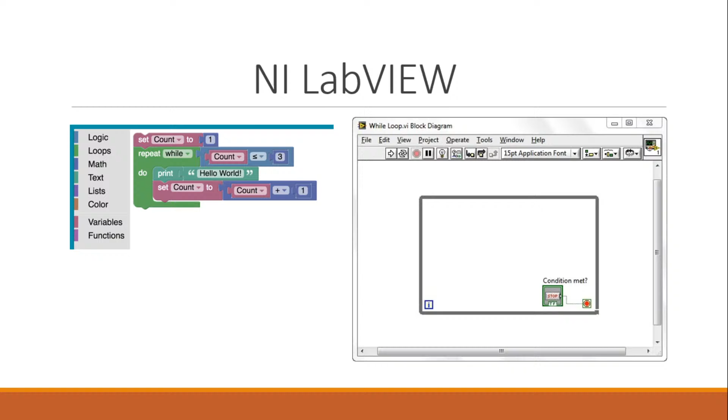So this is how the data flow based or graphical programming works. Let's see the benefits of G programming. So it's an intuitive programming language.

Like most people, engineers and scientists learn by seeing and processing images without any need of conscious contemplation. Many engineers and scientists can also be characterized as visual thinkers, meaning they are especially adept at using visual processing to organize information. In other words, they think best in pictures. This is often reinforced in colleges and universities, where students are encouraged to model solutions to problems as process diagrams. However, most general purpose programming languages require you to spend significant time learning the specific text-based syntax associated with that language.

And then map the structure of the language to the problem being solved. Graphical programming with G provides a more intuitive experience. G code is typically easier for engineers and scientists to quickly understand because they are largely familiar with visualizing and even diagrammatically modeling processes and tasks in terms of block diagrams and flowcharts, which also follow the rule of data flow. In addition, because data flow languages require you to base the structure of the program around the flow of data, you are encouraged to think in terms of the problem you need to solve.

For example, a typical G program might first acquire several channels of humidity data, temperature data, light data, mic or audio data, or picture data. Then it passes to the function where you need to analyze it, the analysis function. Then finally it writes the analyzed data to the disk, to an internet server, or to IoT based platforms. Overall, the flow of data and steps involved in the program are easy to understand within a LabVIEW program.

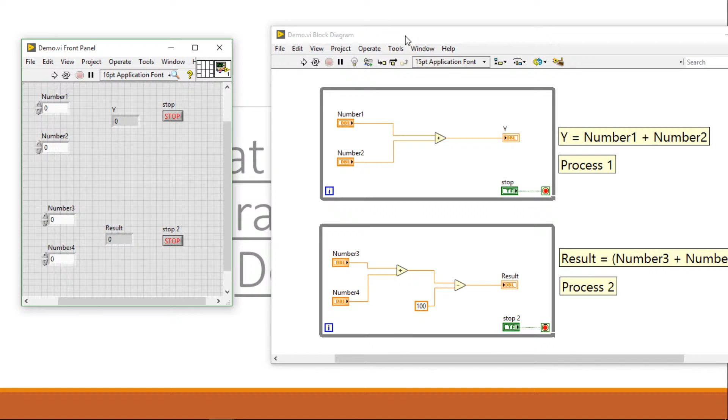So this is a LabVIEW program, a simple LabVIEW program where I'm performing two different tasks. Here, y is equal to number 1 plus number 2, you can call it process 1. And result is equal to number 3 plus number 4 minus 100, you can call it process 2.

As if you don't know about LabVIEW, let me talk about a few important concepts of LabVIEW. Whenever you open LabVIEW and want to write a program, that program is called a VI. You won't call it a program. Whenever I say this VI, that means this program.

So in every LabVIEW program, there is a front panel and a block diagram. What is the use of front panel? Front panel is for user interaction, to get the input and to see the result. That is the use of front panel. And what is block diagram? If you want to write any kind of logic, you write it in the block diagram. So in the simplest terms, front panel is the front end and block diagram is the back end, where you are going to write your logic.

So let's see what I did here. As you guys are aware about C language, C++, or any other programming language, that programming language has data types, structures like loops, for loop, while loop, if cases, switch cases - all these things, all the terminologies which you have been learning in C++ are available in this LabVIEW programming language.

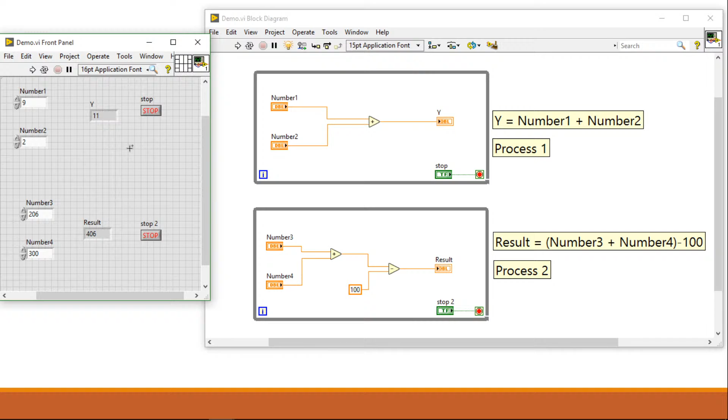So this is how you can create your own simple logics easily in LabVIEW just by using nodes. So when I said nodes, I haven't talked about how to call these nodes and how you can find all the functions. If you want a front panel element, just right click on the front panel and you'll find all the front panel elements available inside the control palette. You can use this boolean, you can see this...

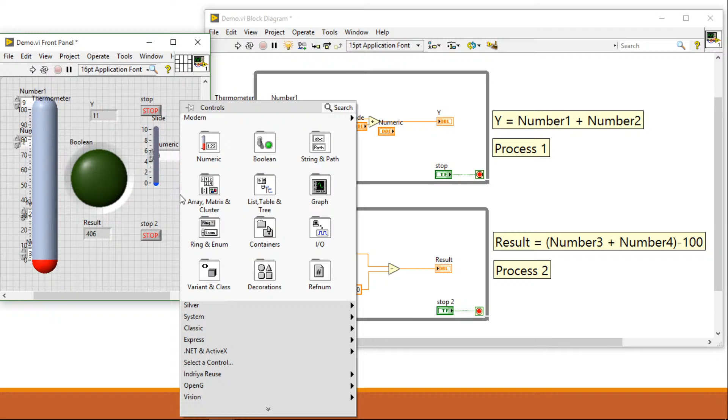...thermometer kind of thing here. So you can create your own supervisory control, right? You can create your own SCADA, you can create your own GUI, you can see this meter and all, right? So these are all controls and indicators.

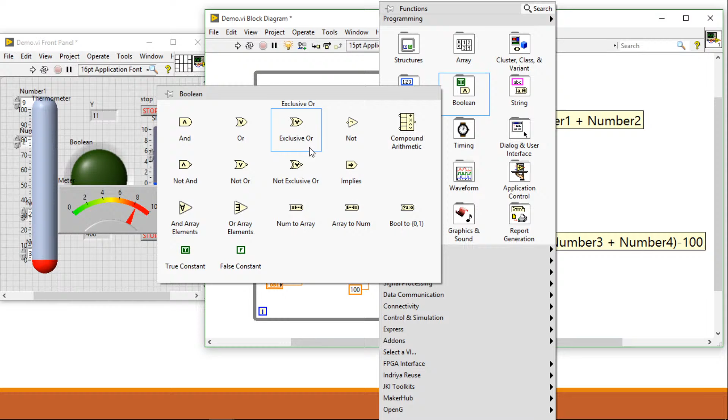If you want to find how to create logic, just right click on the block diagram and you will find the function palette. You can see add, subtract, multiply, all the logic based functions will be available here in the function palette whenever you right click on the block diagram.

So this is the very basic concept of LabVIEW. There are so many things you can explore.

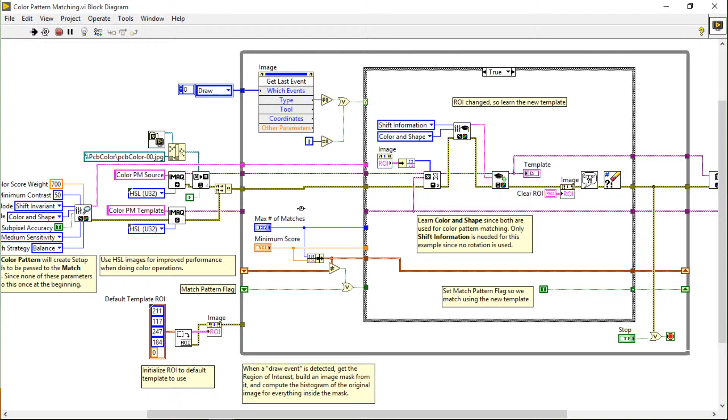I'll show you the program. This is the program of the PCB inspection code, right? So this is the while loop, you can see error handling, you can see there are IMAQ based functions which are specially made for image processing algorithms, right? These are the APIs. So this is the image processing based, or machine vision, PCB inspection system, right? So let me stop this VI.

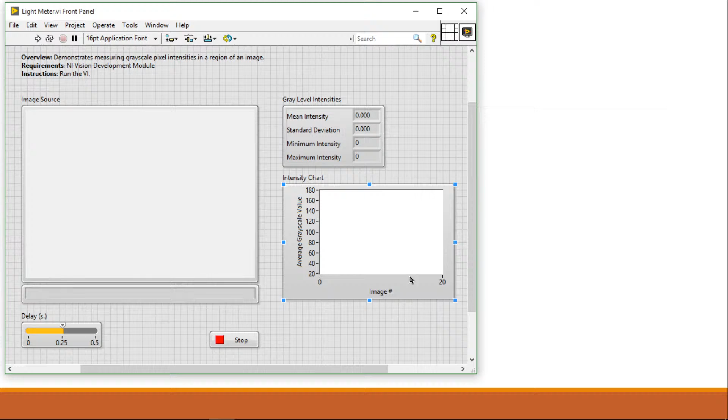This is called a Poka-Yoke system. If you want to launch or check the quality of your product, you can create this using a machine vision based system. Consider a company manufacturing lights, and you want to test the intensity of light. So how can we test it? This is how the system can be used. You can create your own system to find the intensity check, checking the intensity of light using this kind of algorithm.

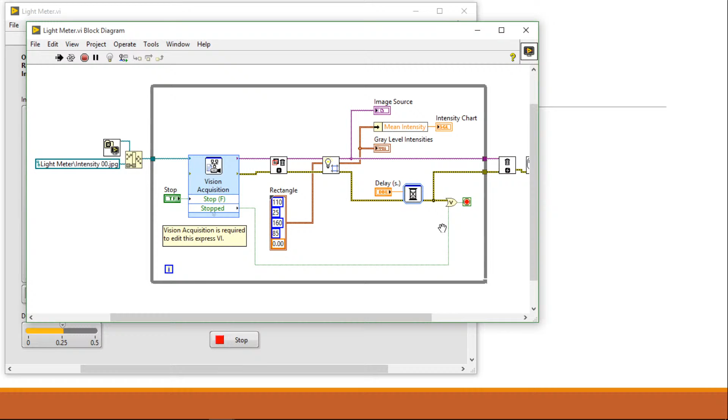Let's see the code. You can see the code is very simple, the simplest code. This is how you can create the algorithm to check the intensity of light. Of course these are simulations, but you can actually grab the image using a camera, industrial camera, smart cameras, and process it using LabVIEW.

So this is the PVC defect mapping system, for PVC pipes. This is how you can create the code. You can see the code in LabVIEW, right?

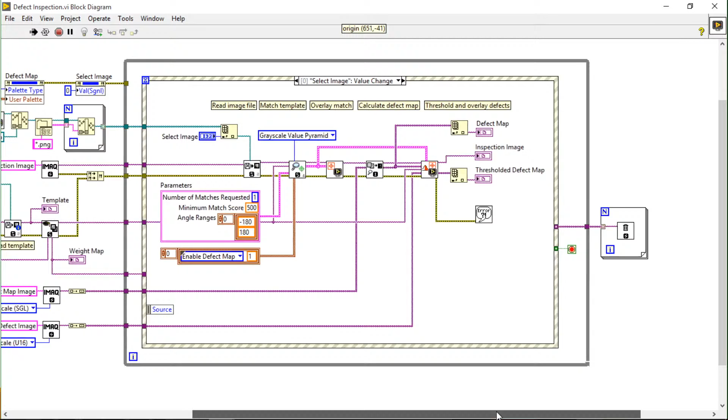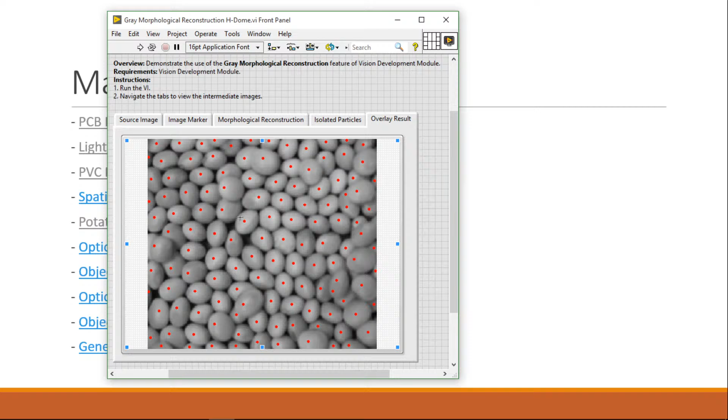Let's see, consider we want to create a project in the agriculture domain. I want to count potatoes, how many potatoes are there, using machine vision. This is the best way to count the potatoes. So many potatoes are here. These red marks are the analysis done by LabVIEW. You can see we can do morphological reconstruction, isolate particles, that's like blob analysis, and then calculate how many potatoes are here. So this is how you can count fruits or objects very easily.

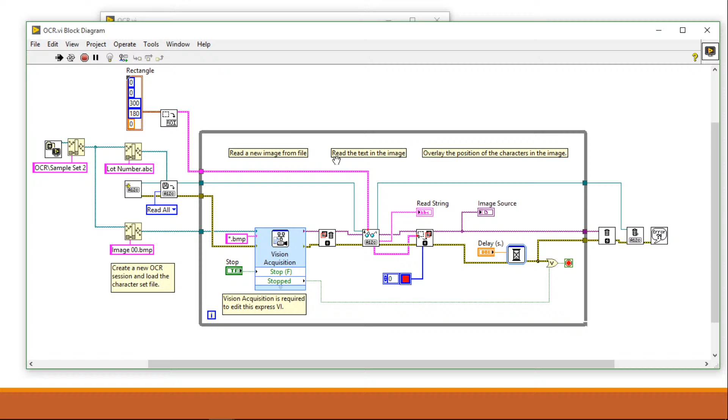Let's see an optical character recognition based application, a very booming concept. This is an OCR based application. Let's see the code. You can create datasets very easily to compare with the image. So this is the OCR based application.

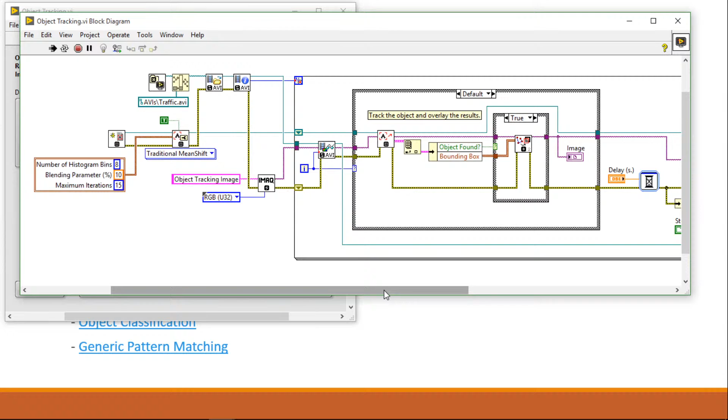Let's see how an object tracking algorithm works. This is the program where we are tracking a car, we are tracking a van. I hope you guys can see this. With the help of this algorithm, we can create this kind of application also.

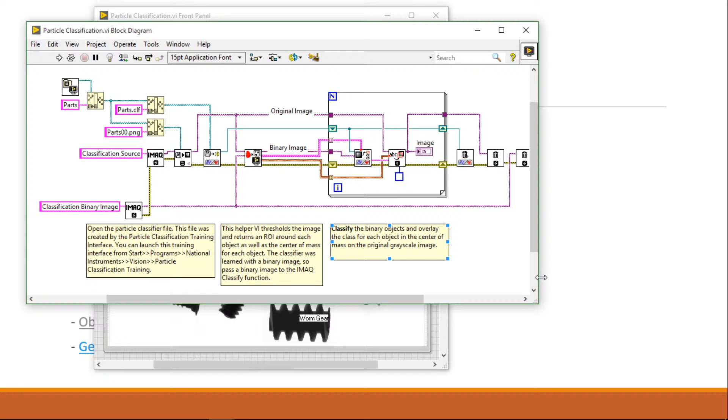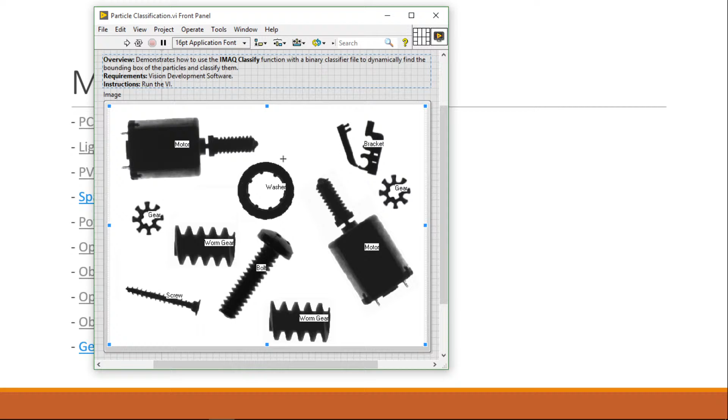So this is how we can create so many machine vision based algorithms. This is like object classification. Here my algorithm is saying this is a motor, this is a washer, this is a worm gear, this is a bolt, this is worm gear 2, this is a motor, this is a bracket, this is a gear screw. So this algorithm in LabVIEW is finding out and giving classification of what this object is, whether it's a motor or bolt or something like that. So you can create this kind of logic also. So that was all machine vision based.

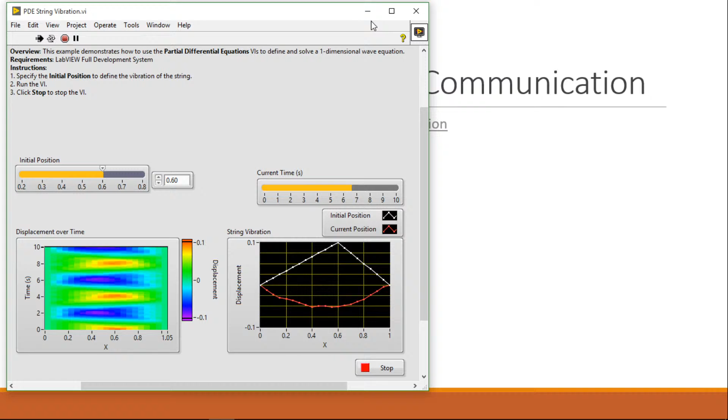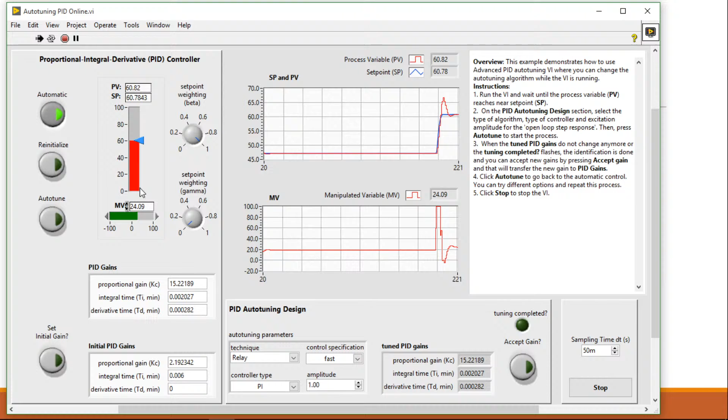I'll talk about how you can do PID tuning. This is a PID tuning based algorithm. You can set up your own PID logic, connect it with some kind of system, and stabilize your system using this simplest algorithm. I'll give you the best example of PID.

Fuzzy based SCADA. Consider there are two different tanks, and you want to control the level of the tank, and you want to maintain the pressure and flow rate. So you can set up a fuzzy based logic, and control the flow rates.

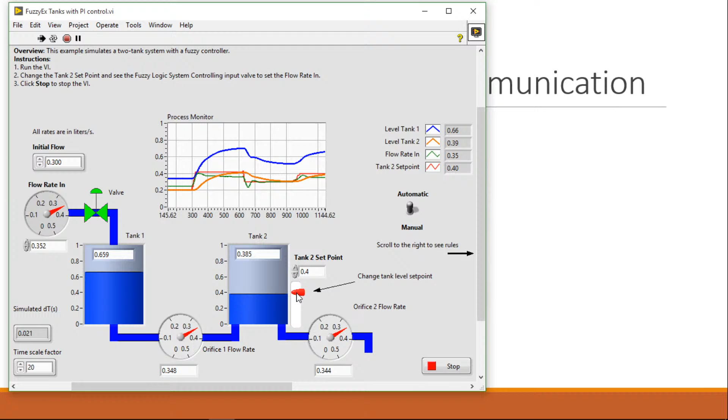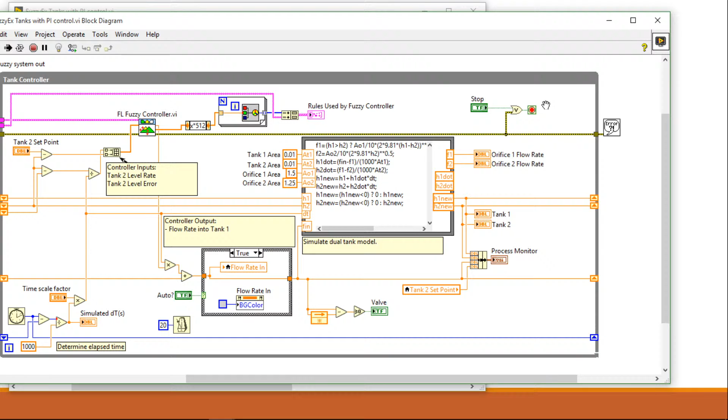So you can create your own SCADA based system, and if you find the logic, you can write your own code, a C code. You can use this fuzzy controller, and of course you can create arrays, loops, all these things are available. Whatever you have been learning in your curriculum, you can directly try it in LabVIEW. These are all available in the examples of LabVIEW installer.

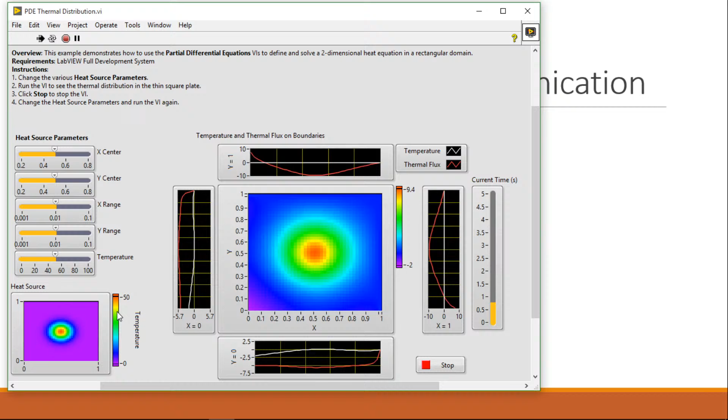So whenever you install it, you will get all these examples, and you can see how the code is written in LabVIEW. Let's see this PDE thermal distribution, how single plane thermal distribution happens. You can simulate the data, and you can create a system as per the simulation, as per your observation. Tank level controller, let's see how. Okay, just temperature monitoring.

PDE thermal distribution. Yeah, a very interesting car backward parking system. Wait a minute, I think I have to start LabVIEW 2020. Okay, so let it be. If you install it, you will find all these examples like the car backward parking system using fuzzy logic, how automatically the car will decide how to park. You will find all these examples directly in LabVIEW.

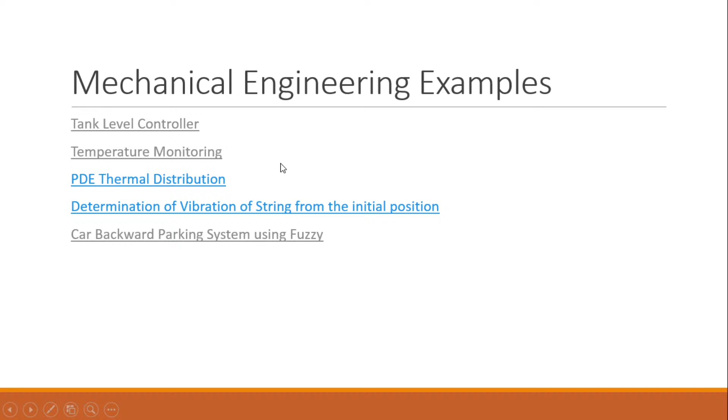So guys, let's install LabVIEW in your system and try to find out these examples, and try to find how this code works, right?

So let's talk about more where LabVIEW can be used for. You can use LabVIEW in the automated test bench system, data acquisition. You can use it in SCADA, PLC control, FPGA programming, instrument control and monitoring, signal processing, embedded system design, and still counting. You can use LabVIEW anywhere, right?